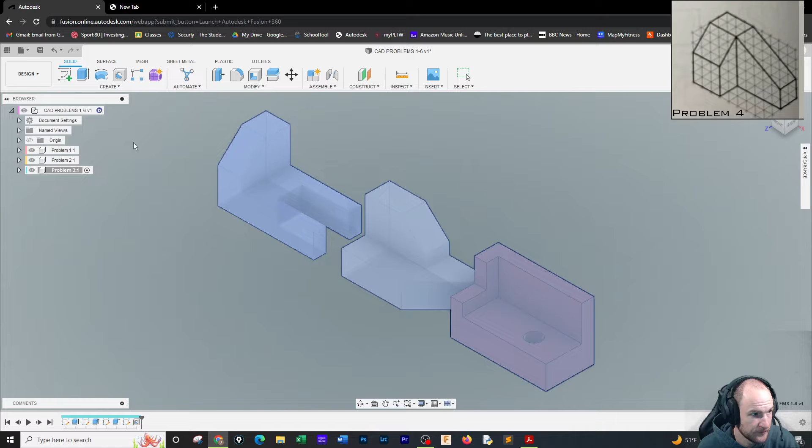Number 4. Moving right along to number 4. So I finished 3. I'm going to go up here. Gonna right click to make a new component. I'm going to call it component 4. No, I'm going to call it problem 4. So problem 4, click OK.

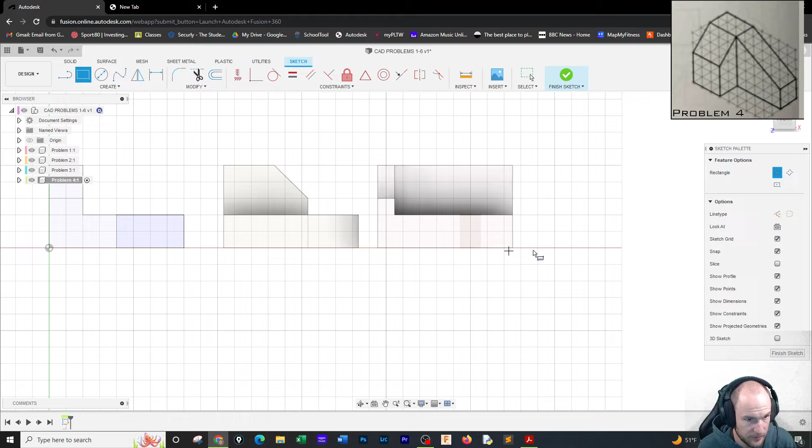New component down here. Going to create a sketch on the front view. And just like I've done all the previous times, they come right off of that. Keeping them all level. Don't necessarily have to do this, but I've been doing it. And problem 4 is once again, it's 1, 2, 3, 4, 5, 6, 7, 8. So it is another 8 by 5. So another 8 by 5.

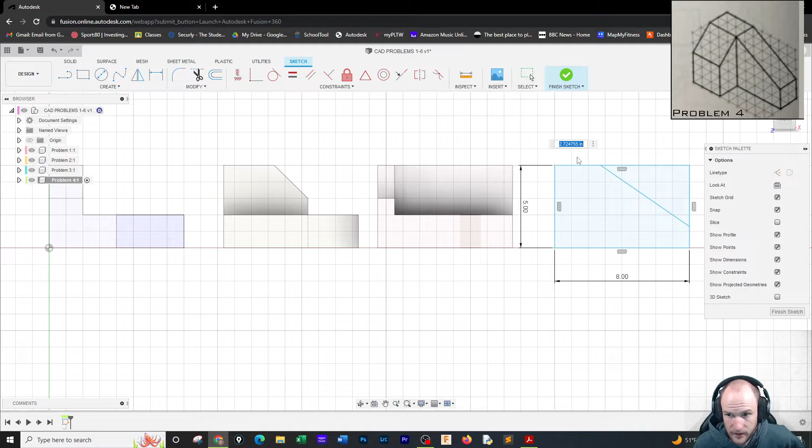And then looking at this, there are definitely things we want to cut. So I'm going to save myself a step later by taking care of it now. I'm going to draw a rectangle on here. And this rectangle from here to here is 3. And from here to right here is 2. And we're going to hit the old finish sketch button.

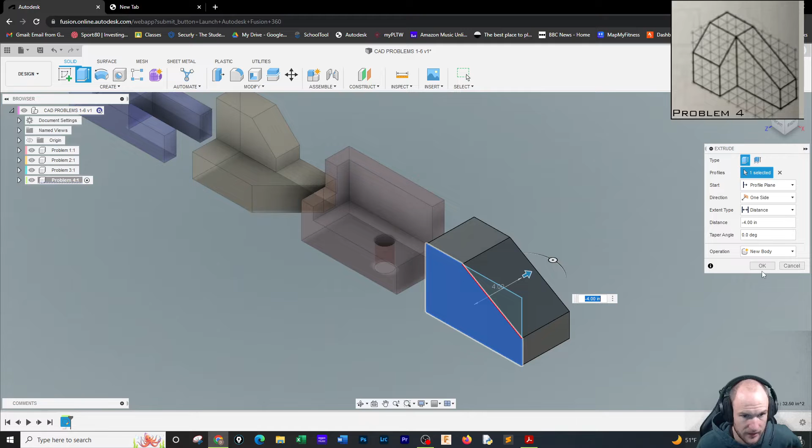And I'm going to extrude from here back 4. 1, 2, 3, 4. Yep. So -4 back. Whew. I didn't even plan on it landing there. It just did. Alright, so we went -4 back. And then we got some work to do. Now, since I cut from right here, it's going to make things a little more difficult to cut this area out here. I'm going to have to do an extra step.

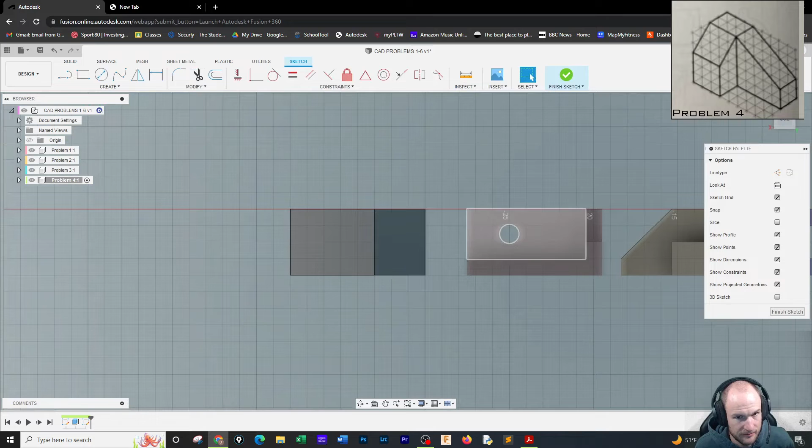So I'm going to go here. I'm going to click on that top flat face. Got to rotate. So I'm going to turn this off so you can see. I'm going to rotate around. Make sure everything's lining up right. And what I want to do is I want to make a box in here. But the thing is, I need to use a tool called projecting the geometry. So I need to go to project and click on that.

What that does is now I can actually make sketches off of this slanted area, whereas I could not before. I wouldn't have been able to snap onto that corner. But since I can now, that makes my life super easy because I just need to draw a rectangle that is 2 inches by 5 inches, which happens to draw it from that bottom corner to right there where it links up.

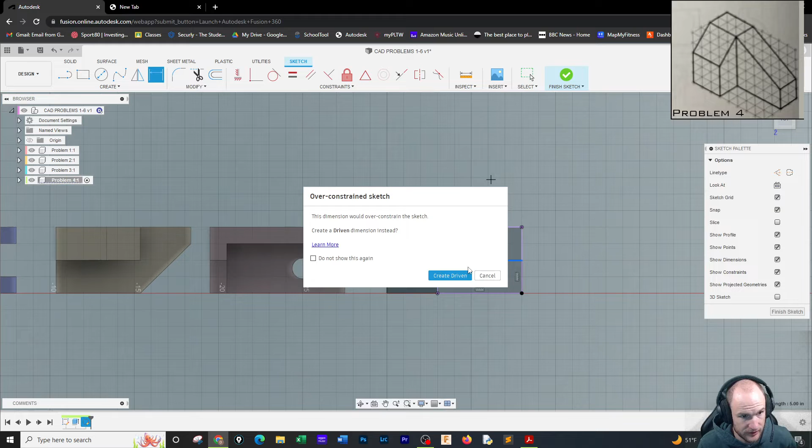And if you don't believe me, we got 5 inches here, and it's going to say you can't do that because you can't. Because when we clicked on this center point, we said, yes, we want it to go over there, which means the computer's like, hey, it's already 2 by 5, and you said it can't move, so it's dimensioned. So we got that, which is great.

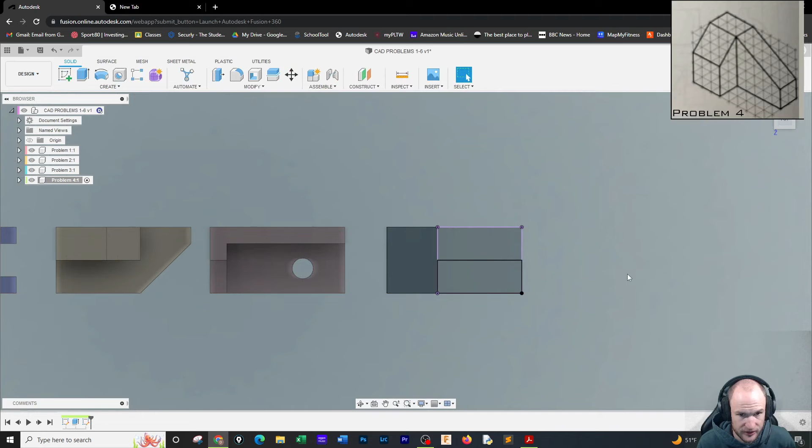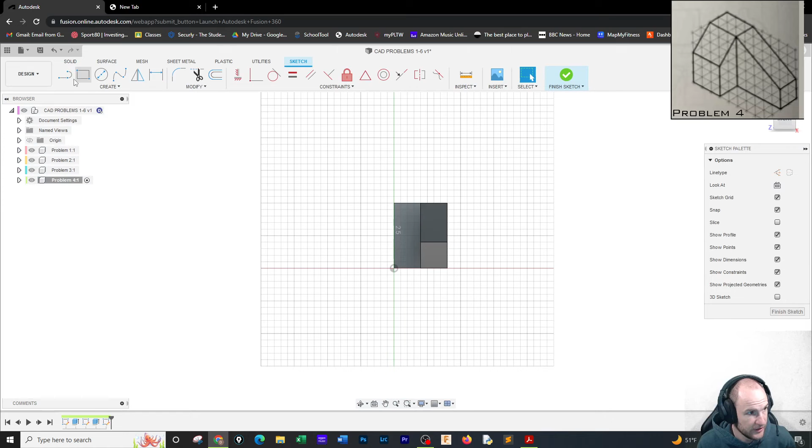I'm going to hit Finish Sketch. And go up to the top view, and we're going to take this, and you see how now it's going down perpendicular to the base. And we will just cut that out. Okay. And then I just got to cut out over here. So I'm going to make a sketch onto this face right here. I'm going to make a triangle in here. So from here to here, I'll draw something.

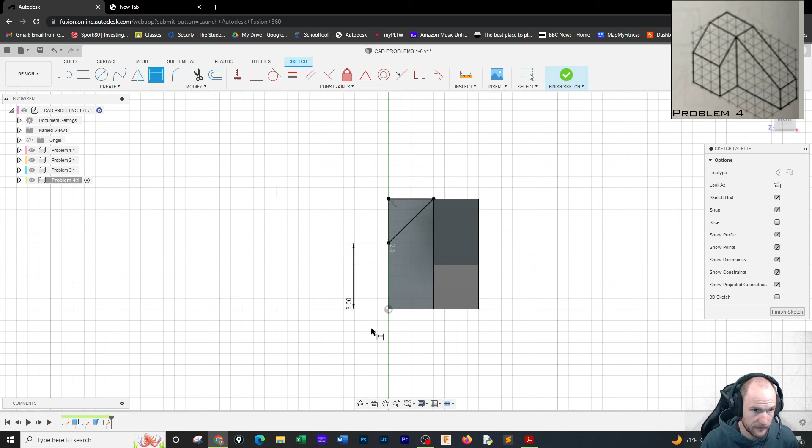From here. And this is a triangle that's only going to need 1 dimension because I know the top dimension is right there. So I only need this dimension, which from here to here is 3. From there to there is 3. Okay. Hit Finish Sketch. Spin it. Going to extrude. I'm going to click. And we'll extrude in 3.

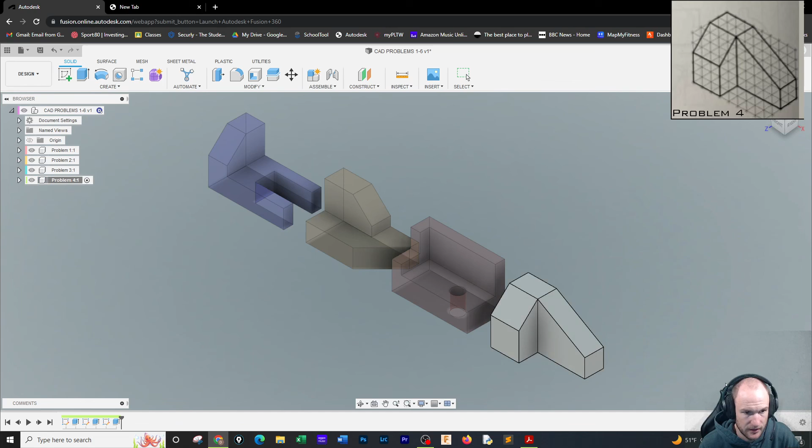And there you go. That's number 4. Slap some color on it. Let's go with white. All right, that's number 4. I'll see you for number 5.